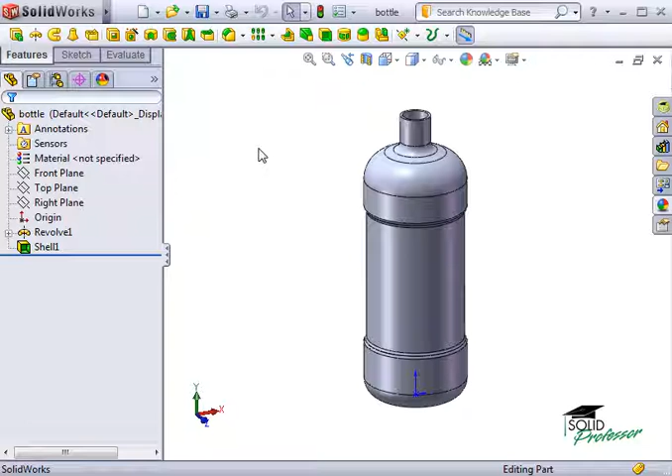Let's begin by creating the helix for a sample thread. The helix will be based on a circular sketch. Often the dimension from the top of the bottle to the top of the thread is important. Because of this, rather than sketching a circle on the top face of the bottle, I'll create a plane offset from the top surface.

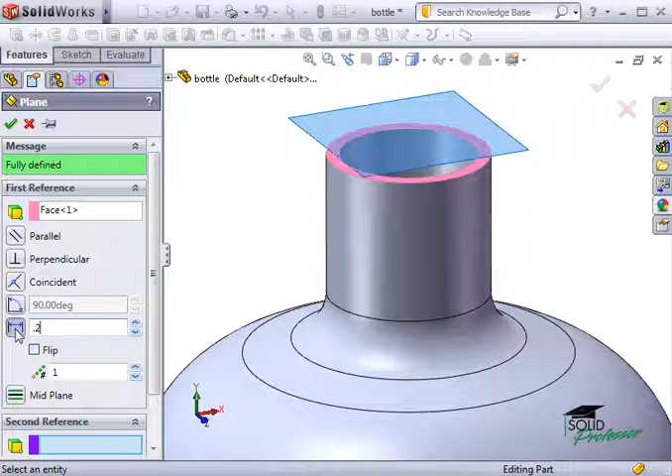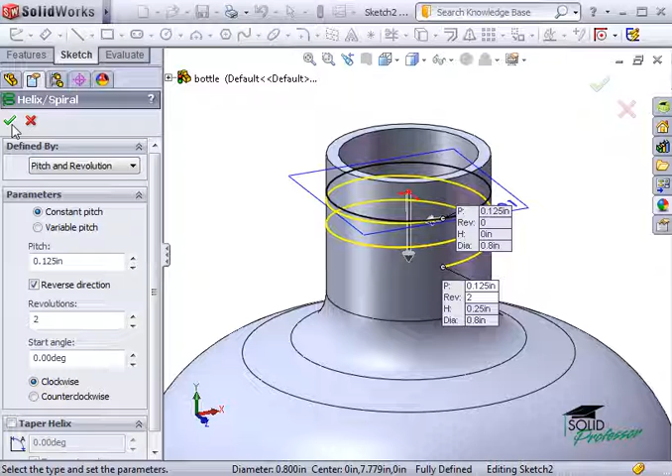Next, I'll begin a sketch on the newly created plane, and I'll convert the top edge of the bottle to generate a circle. With the circle in place, I can launch the helix feature from the Insert, Curve drop-down menu. The helix will be defined by pitch and revolution. I'll specify a constant pitch and a number of revolutions starting at 0 degrees. Then click OK.

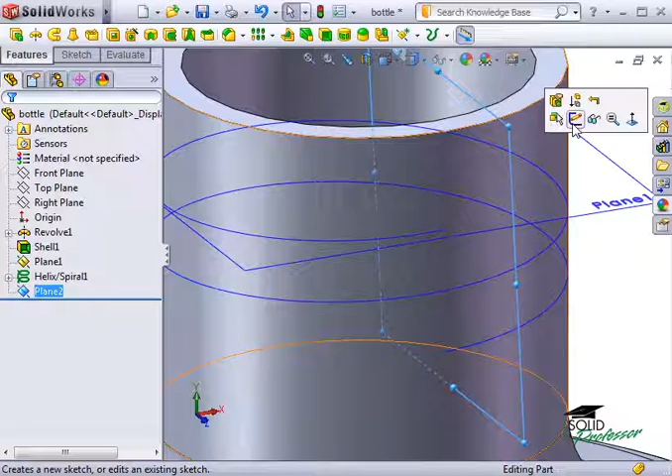Now that the thread's path is created, I'll move on to creating the thread profile. This will be the cross-sectional shape of the thread itself. I'll create a new plane that is normal to the end of the helix. This will provide the correct orientation for the cross-section. And I'll sketch the thread profile on the new plane. Sketching the thread profile is the most time-consuming step in creating a thread. Since thread profiles are likely to be reused, consider saving them to your design library for quick access.

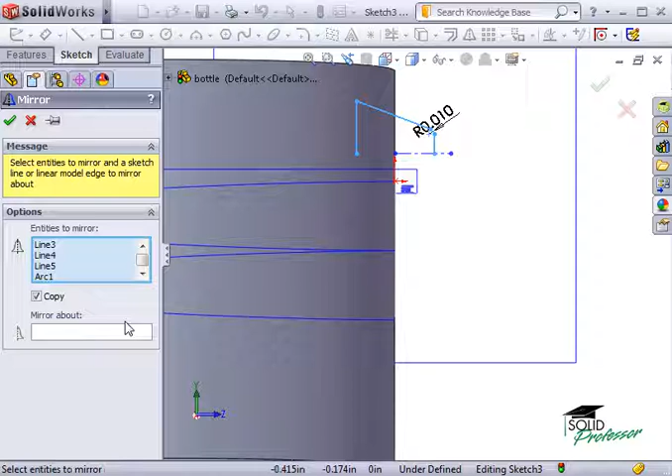You'll want to make sure the sketch for the thread profile is fully defined. That way you can be sure the resulting thread geometry is exactly what you're looking for. I'll continue adding dimensions and relations to fully define the sketch.

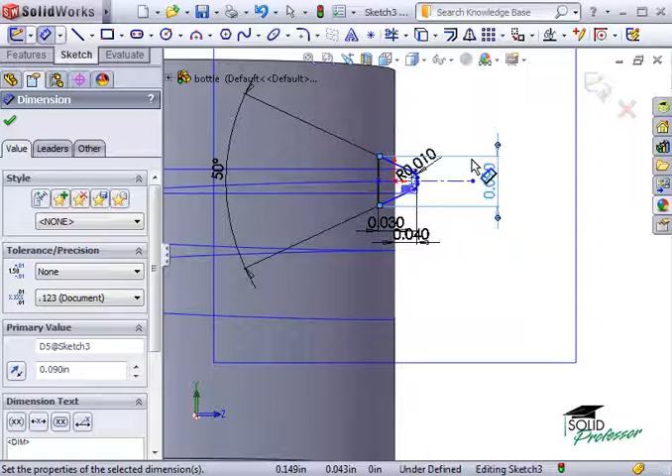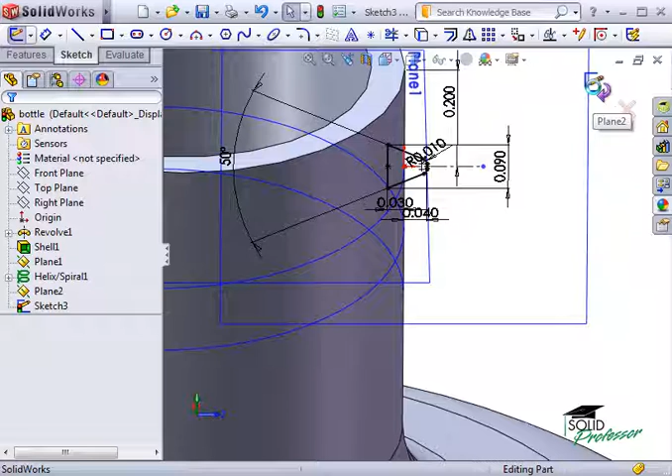Note the overlap of the thread profile into the body of the bottle. This is important. Without the overlap, the contact area between the thread profile and the bottle could result in zero thickness geometry, generating an error. With the thread profile complete, I'll exit the sketch and create a sweep feature. The sweep profile will be the thread profile sketch, and the path will be the helix. I'll click OK, and the thread is nearly complete.

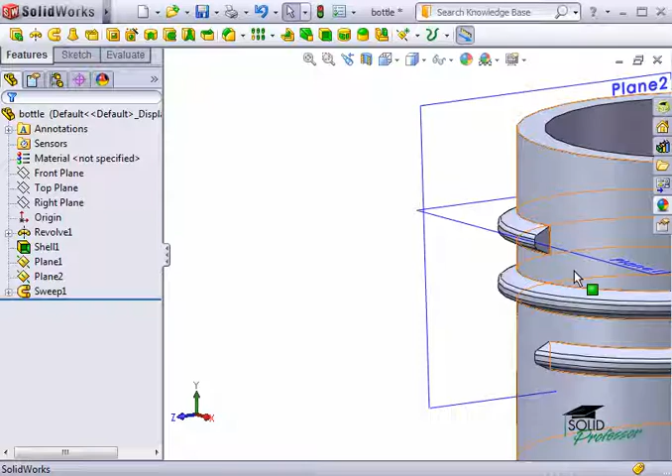It's important to notice that to create this external thread, we're simply adding a sweep feature. The same process can be used to create an internal thread, but by instead applying a swept cut to remove material. At this point, all that remains is to terminate the ends of the thread. There are several techniques for doing this. One of the more common approaches is to use a revolve feature.

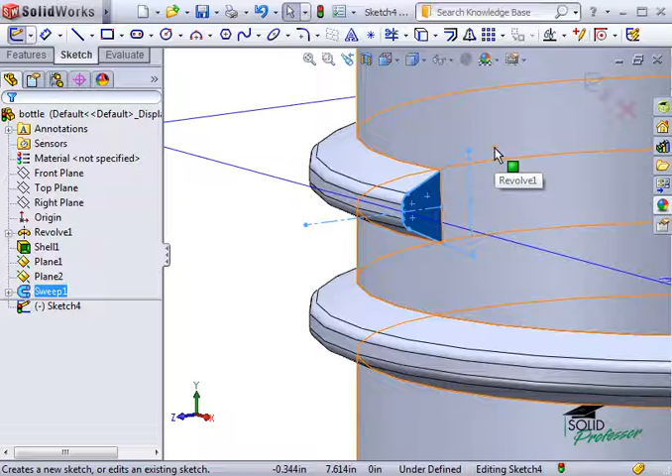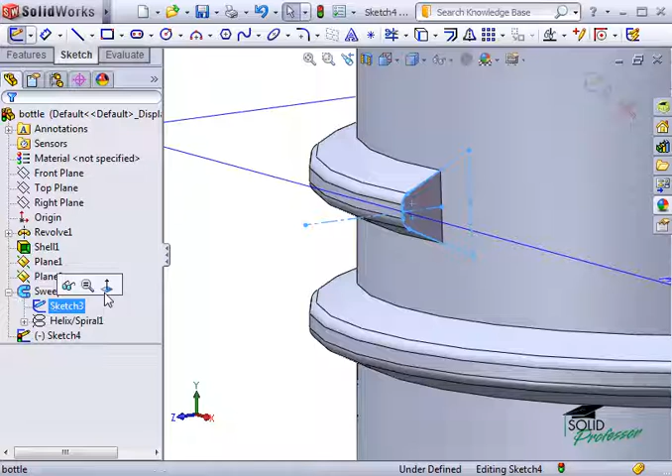I'll begin a sketch on the starting face of the thread. The profile I'll be revolving is the shape of the thread itself. Using the Convert Entities tool is a quick way to capture the shape. However, note that converting the face itself can cause a problem. The lower edge of the profile is not linear, so it can't be used as an axis of revolution. I'll use Convert Entities with the original sketch selected from the Feature Manager tree. This gives me the profile I need.

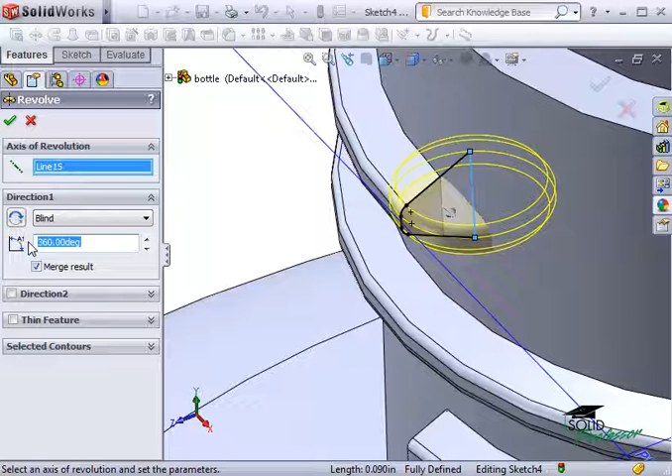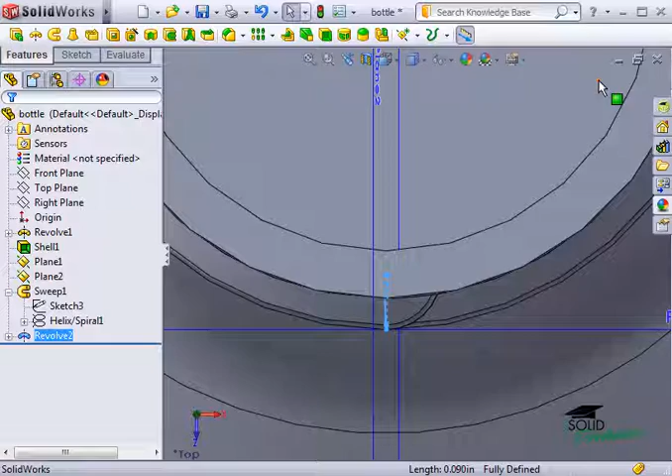If you want to make sure the revolved feature completely merges with the bottle, extend it well beyond the bottle surface. Then as a second step, you can cut away any material that protrudes on the inside. This completes one end of the thread. The other end is a bit more complicated because we don't have the original sketch available for use as a reference. There are several ways to overcome this.

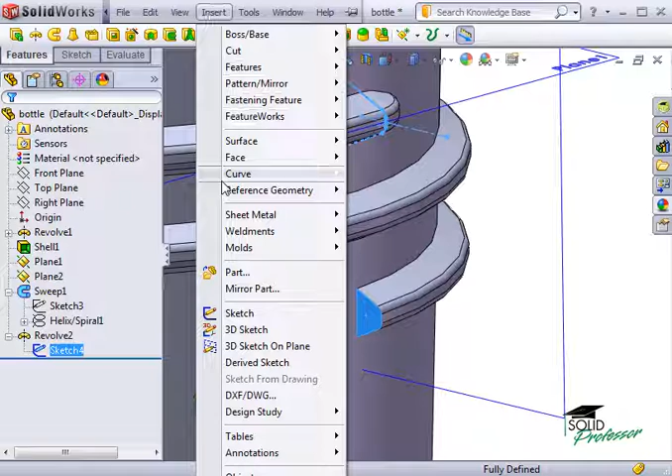The approach I'll use is to simply reuse the sketch from the other end of the thread. I'll do this using the little-known derived sketch command. I'll select the end face of the thread along with the sketch used previously for the revolve. I'll then click Derived Sketch from the Insert drop-down menu. To position the sketch properly, I'll add a couple of geometric relations. And the sketch is complete.

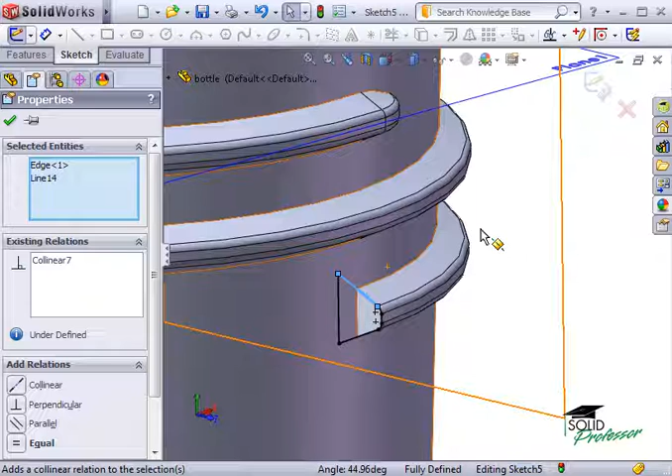Note that this derived sketch is controlled entirely by the original sketch. Once it's in position, it is fully defined without the need for dimensions. I'll create another revolve to complete the thread. And there you go. We get exactly what we were looking for.